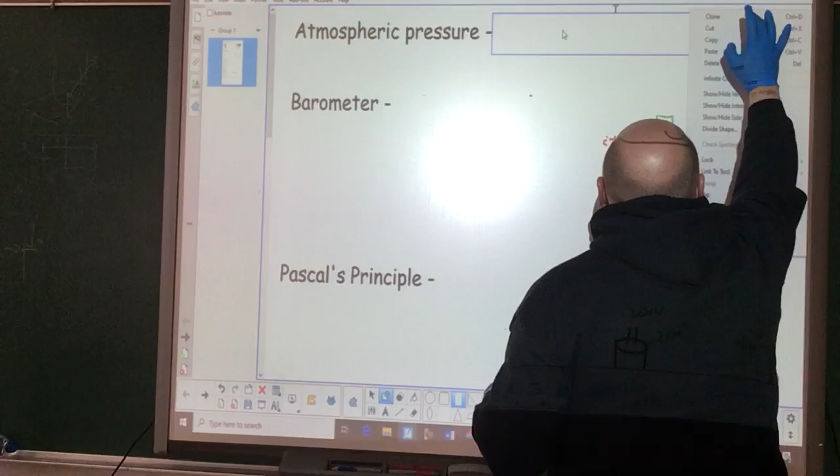We have what is called atmospheric pressure. This atmospheric pressure is pushing in on our body. So when you're talking about atmospheric pressure, it is the pressure exerted on our bodies by the environment. The atmosphere is around us, pushing air on top of us. We have a pressure that's put on top of us. It sort of keeps our shape, how we are formed.

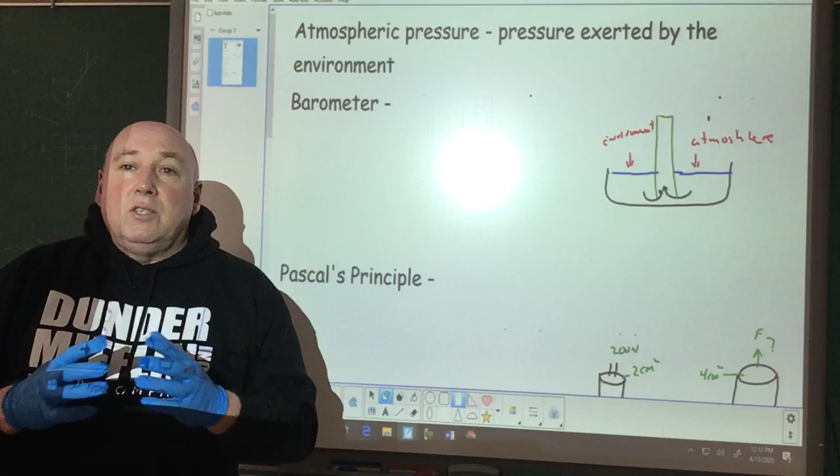Without atmospheric pressure, what would happen is we would probably explode. If you would travel out in space, where you don't have atmospheric pressure, you have to wear a suit. It's called a pressurized suit. If you don't have that pressurized suit, basically you would explode, and that wouldn't be a good thing. So the atmosphere that we have continues to push on top of us to sort of keep us how we are.

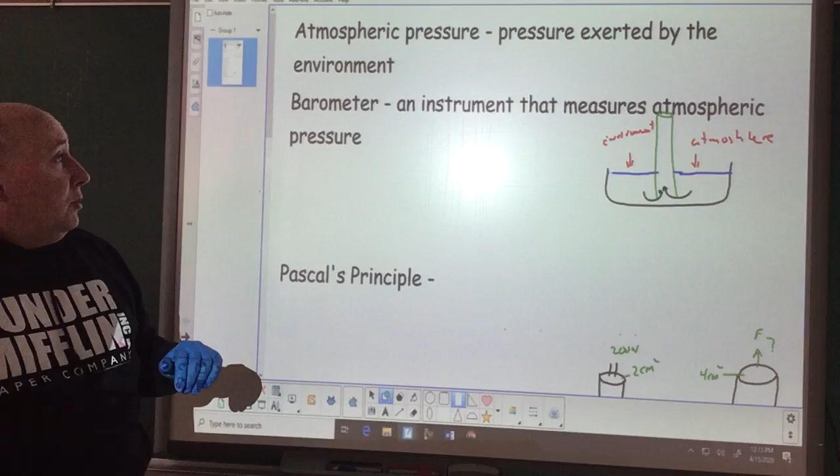The barometer is an instrument that's used to measure atmospheric pressure. An instrument used for the atmospheric pressure, and that is what is called a barometer. Now they basically have all computerized stuff, and digital things that are on the wall that can measure that pressure.

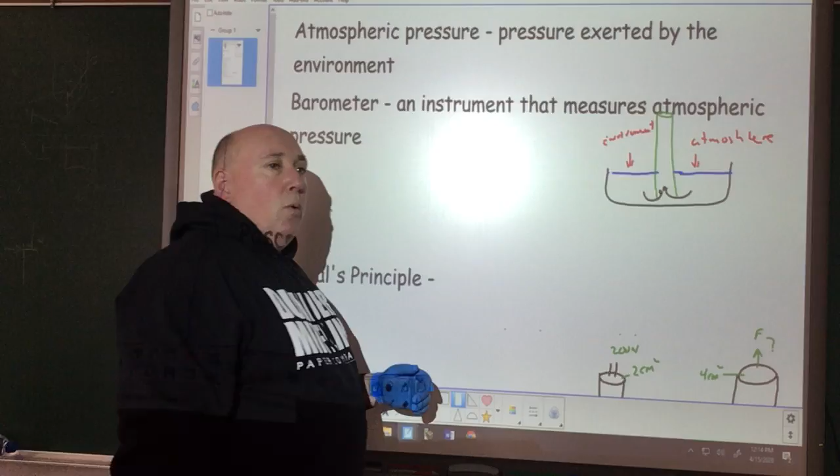But the old school way, how they used to do it, the barometer used to be in a dish that was contained. You'd have this dish here. You would fill this tube up and turn it upside down, and then it would lower to a specific level because there was pressure being pushed up that was pushing the fluid back up in there. There was pressure pushing down here that would keep the fluid up in this tube. That's how they used to measure atmospheric pressure - the height that you had there was the atmospheric pressure, because you had the atmosphere pushing down and pushing the fluid up into the tube.

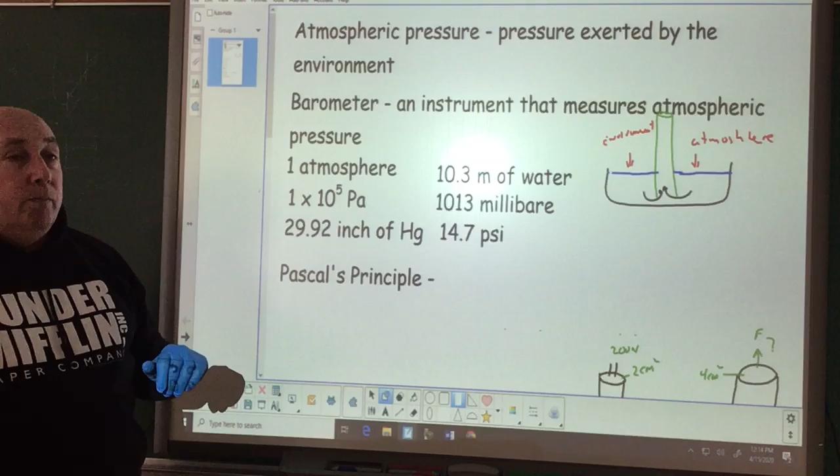Now, standard measurements for pressure. You have 1 atmosphere of pressure. In the SI system, that's 1 times 10 to the 5th Pascals. That is the standard atmospheric pressure. This is what typically the United States still uses, 29.92 inches of mercury. This is a standard pressure. Once again, these are all standard pressures.

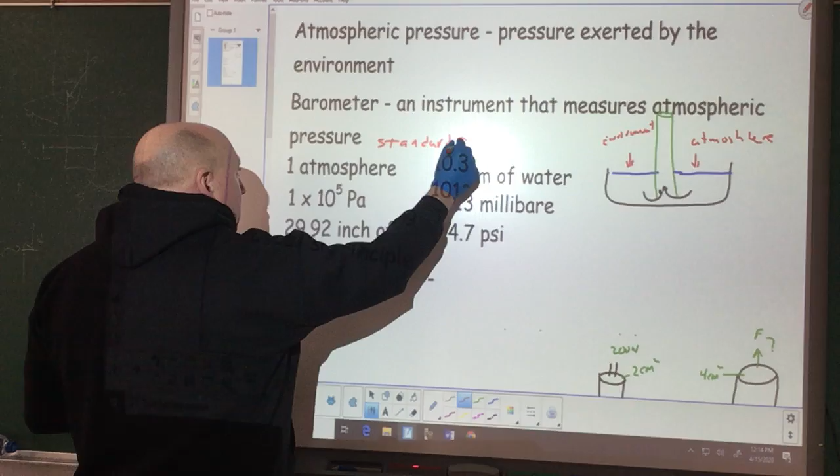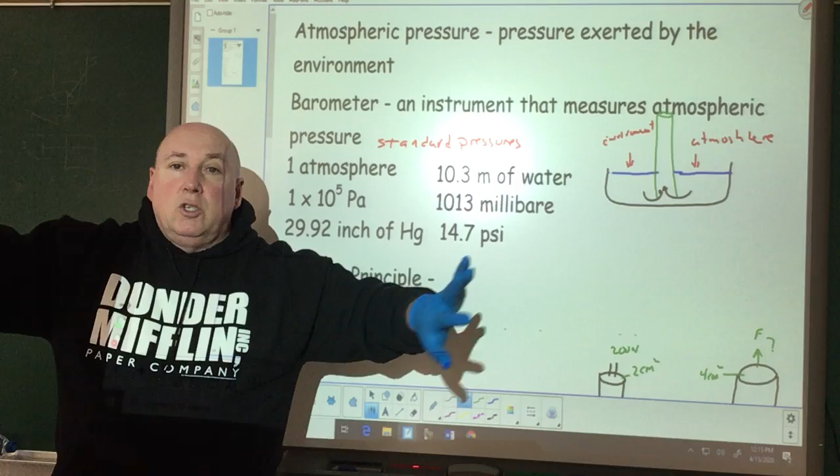These are all standard pressures where everything is just average, basically. The weather systems that we have coming in, we have a high pressure weather system and a low pressure weather system. High pressure tends to bring us fair weather. It puts more pressure on the clouds and just shoos the clouds away. That's a simple way of thinking about it, shoos the clouds away.

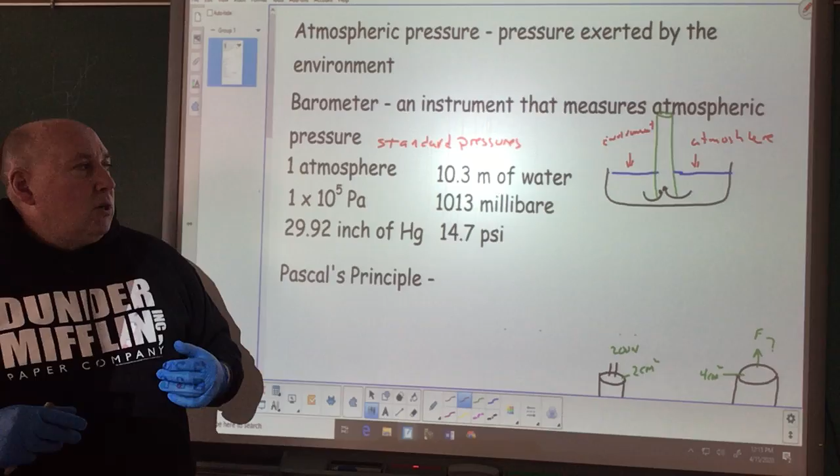We also have pressure volume. You have the ideal gas law, that you increase the pressure, you'll decrease volume of what is around, also with respect to your air. This column of water, if this is a column of water, it would support 10.3 meters of water - it's pretty tall. That's 1,013 millibars or 14.7 psi.

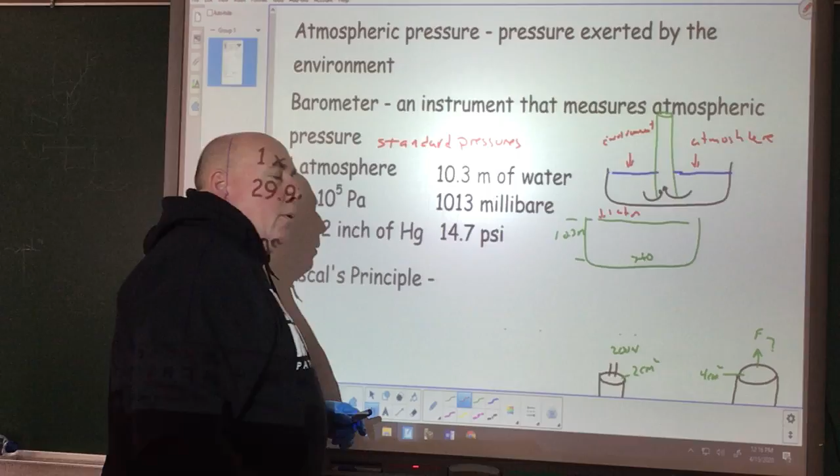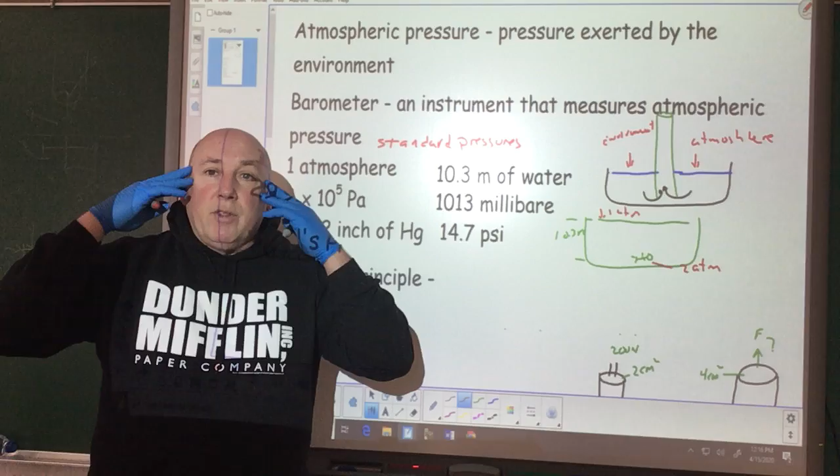This 10.3 meters of water - if you were sitting in a pool, and you're down here on the bottom of the pool, and this is 10.3 meters - what this would result in is you have an atmosphere of pressure that we feel on our bodies right now. If you come down to this level right here, you would feel a second atmosphere of pressure because you're 10.3 meters below the surface of the water. Once again, the pressure that you have would be hard on your eardrums. You'd feel it in your eardrums.

Weather systems: a high pressure system gets up about 30.5 inches of mercury, while low pressure gets down to 28 or 27. When it drops really low, that means bad weather systems are coming in—hurricanes, snowstorms, blizzards come with low pressure. High pressure shoos the clouds and bad weather away. We like being under high pressure systems, unless you want a snow day. High pressure weather systems mean you're going to get sunny weather.

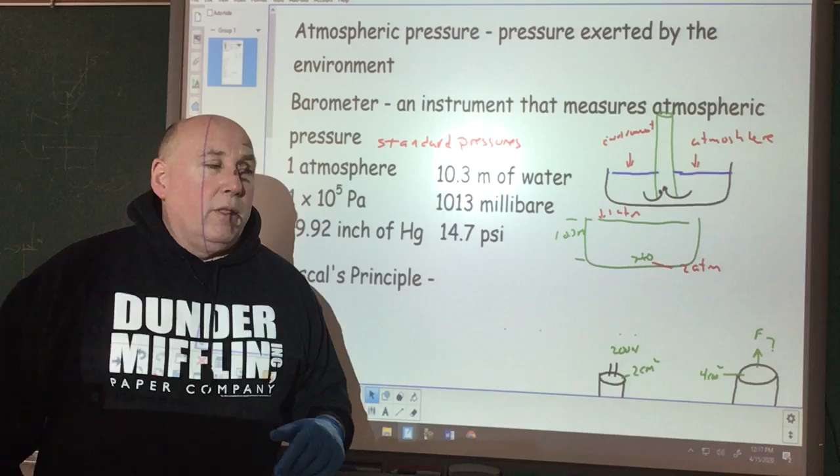Pascal's principle. This is used a lot.

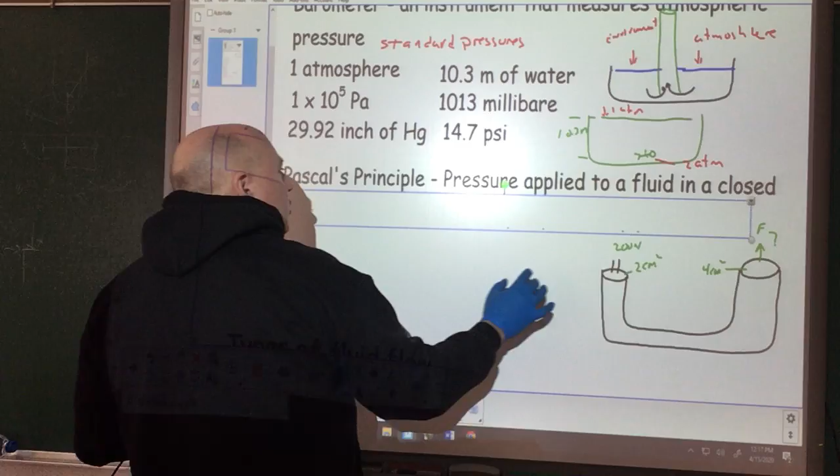Think about hydraulic lifts, lifting up cars at automobile shops. They use Pascal's principle to determine this. Pascal's principle states that pressure applied to a fluid in a closed container is transmitted equally to every point of the fluid and to the walls of the container. You will have equal pressure throughout, not equal force, equal pressure throughout. Blaise Pascal was also a high-end mathematician. He developed mathematical principles—a lot of those scientific guys back then dabbled in both math and science.

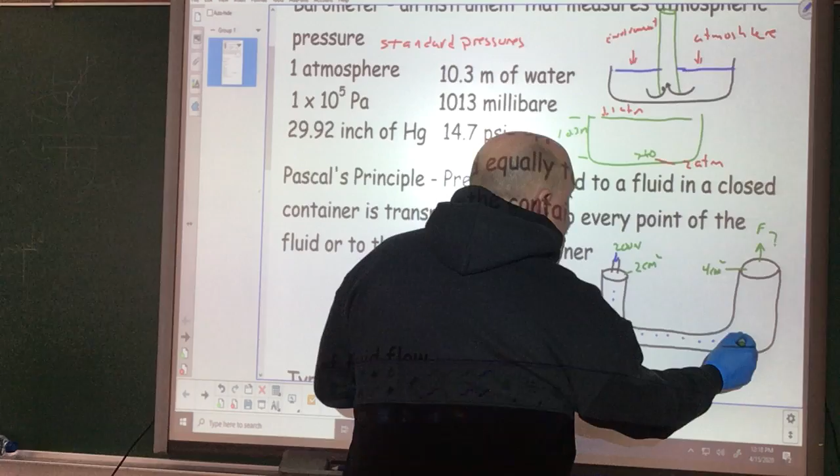Let's take an example: we have a 200 Newton force pushed down on a plunger for this hydraulic lift. This is a very crude hydraulic lift, that's fine. The pressure will be the same throughout. The force will not be the same throughout unless the areas remain consistent. But if the area changes, the force being pushed upward will change also.

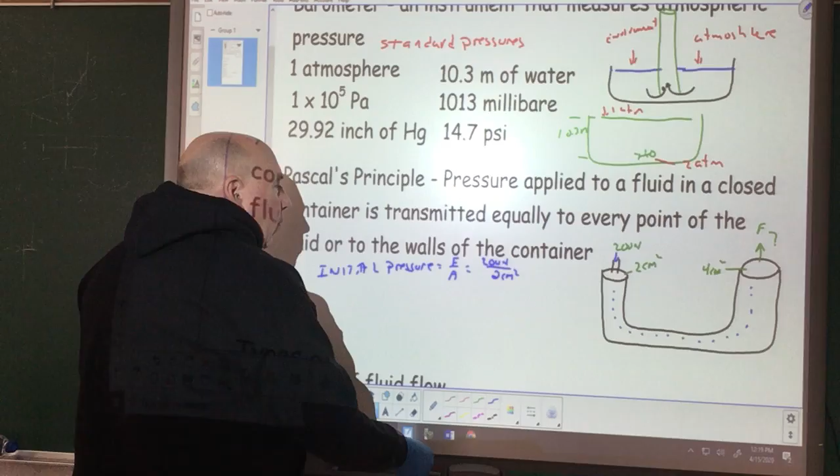So we have a 200 Newton force and 2 square centimeters as our area. Our initial pressure is equal to force divided by area: 200 newtons divided by 2 centimeters squared. So our initial pressure is 100 newtons per centimeter squared.

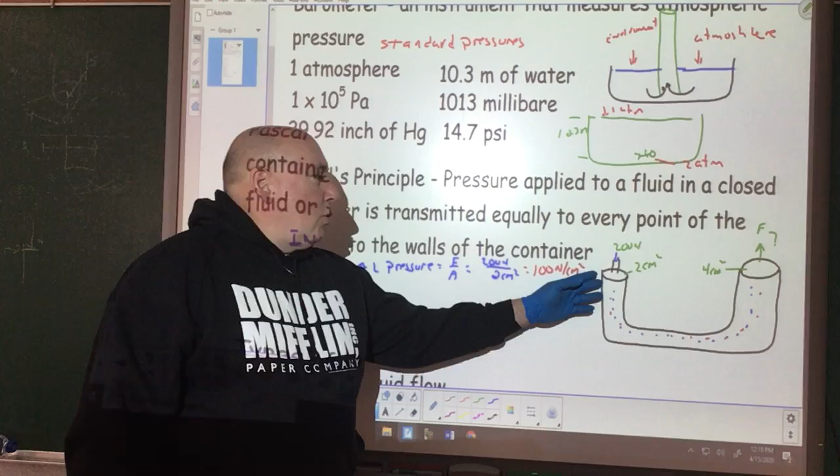That pressure will be the same throughout this entire container—100 newtons per centimeter squared. I didn't convert to meters since I have square centimeters that cancel out. But if I had newtons per meter squared, those are called Pascals—Pascal's principle, yes, there is a relationship there. So we have 100 newtons per centimeter squared throughout this entire device.

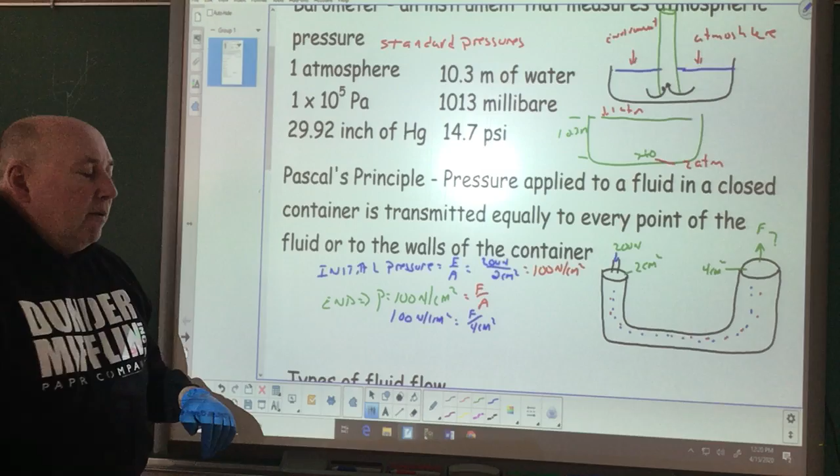What would be the force coming out? I have 4 square centimeters as my area as I leave. At the end, the pressure still has to equal 100 newtons per centimeter squared. Pressure is force divided by area, and my area at the end is 4 square centimeters. So 100 newtons per centimeter squared equals force divided by 4 square centimeters. We multiply both sides by 4, and my force at the end equals 400 newtons. So I start with 200 newtons here and end up with 400 newtons coming out the other end.

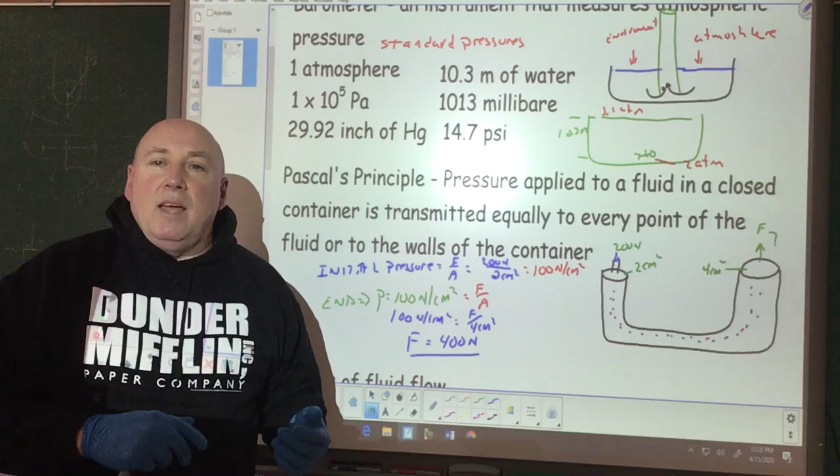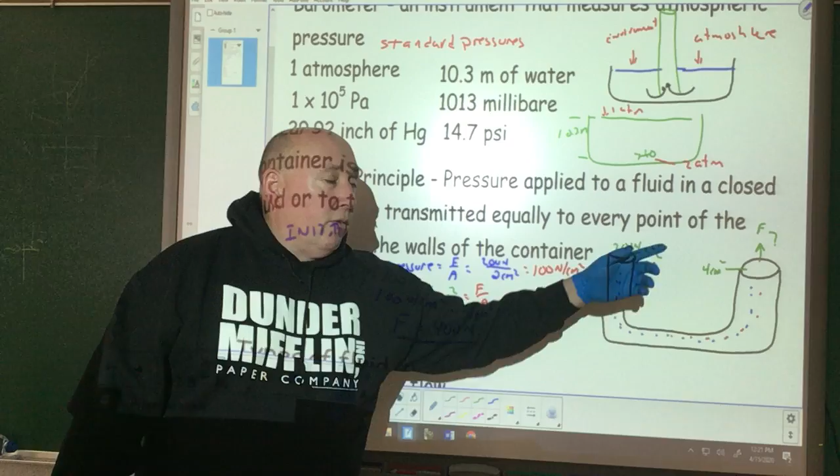So I'm exerting a force—this is a machine, like we talked about before, that makes life easier. As I apply pressure here, I increase my force over there. I don't have to exert as much force here because I'm restricted by area, but over there I get more force coming out. That's a good thing—that's how hydraulics work.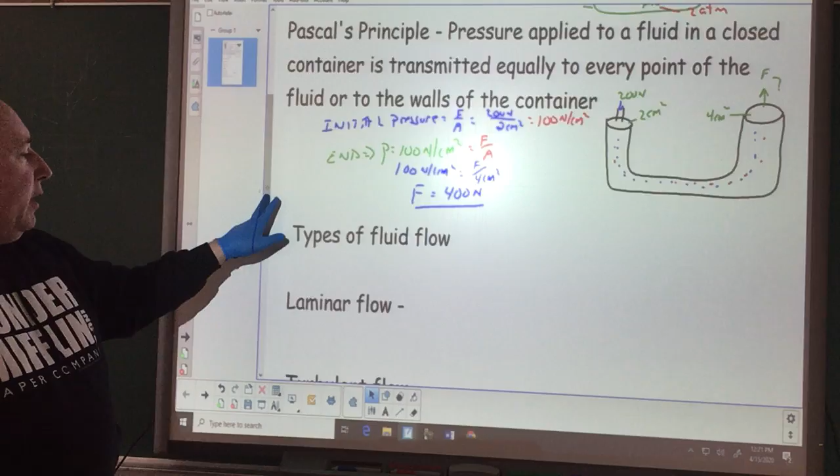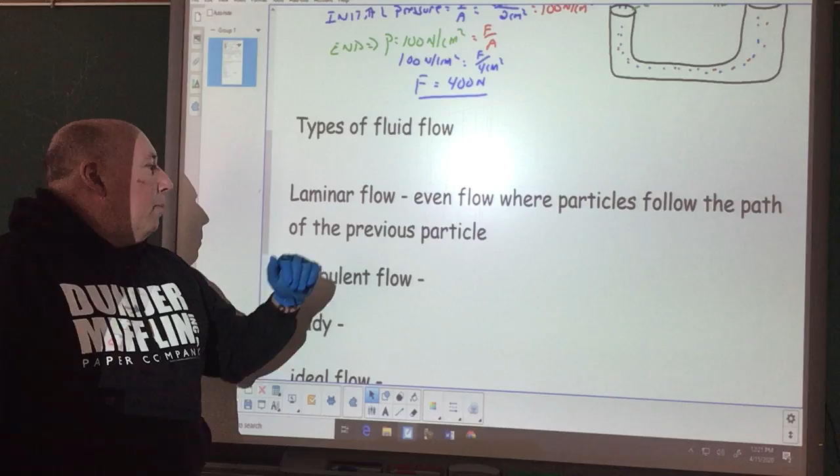Types of fluid flow: we have laminar fluid flow. When it's laminar, you have an even flow where particles follow the path of the previous particle—like a nice even flow of water or air with no bumps in the road. It's like driving on a nice paved new highway where it's smooth, not like going down Burton City Road trying to get through all the potholes. A nice paved road—that's like laminar flow.

But then we have turbulent flow, which is an irregular flow with interruptions—you tend to have jagged patterns. Turbulent flow is like turbulent driving down Burton City Road. That road needs to be redone.

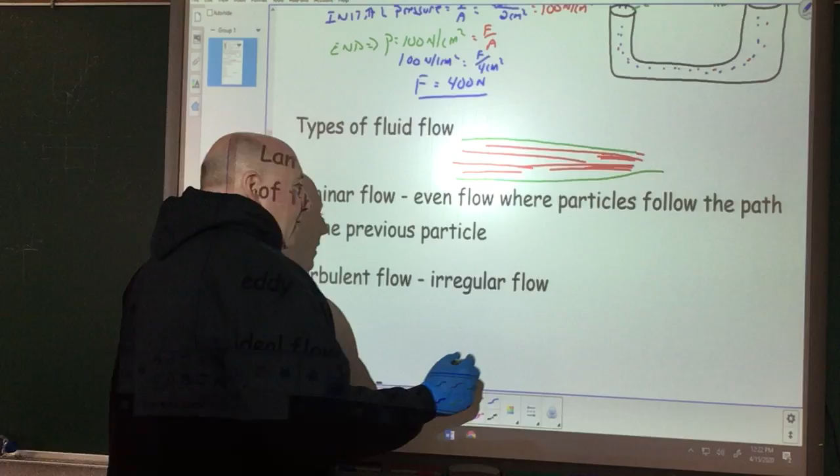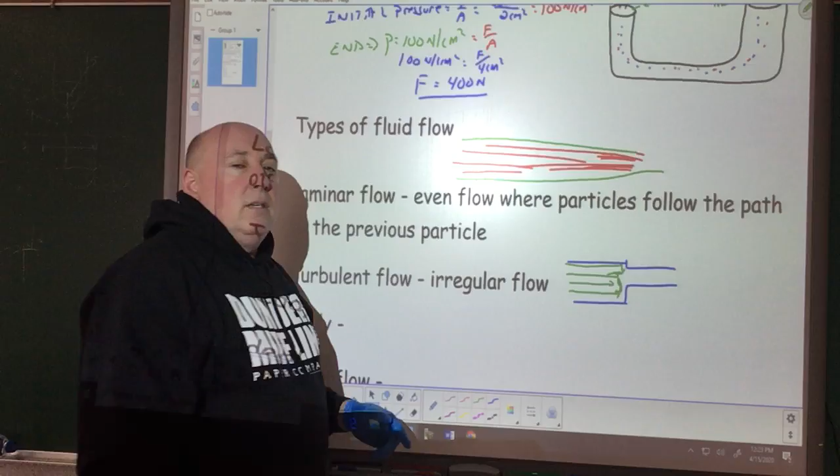If we had a pipe that was restricted, the water or air flowing through it would start hitting the walls, and all of a sudden we'd have to start taking right turns and left turns and getting in each other's way. What would happen is you start getting a turbulent flow at that point.

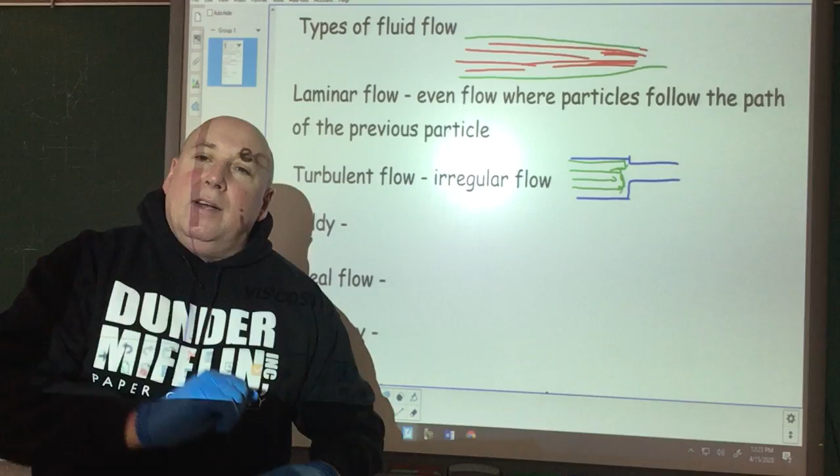When you have irregular flows, that's a turbulent flow. Think about going canoeing down the river—when it's nice and smooth, that's your laminar flow. But every once in a while you get to the raging rapids with all those rocks underneath the river, and all of a sudden the water starts getting churned up and pushed into the air. That's a turbulent flow.

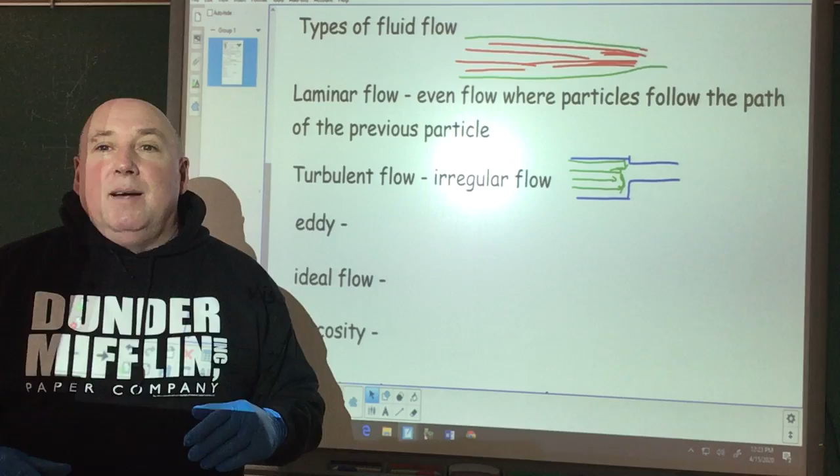The raging rapids, we sort of enjoy those at times. You've got to hang on a little bit, but those are fun to go through. That's a turbulent flow compared to a laminar flow.

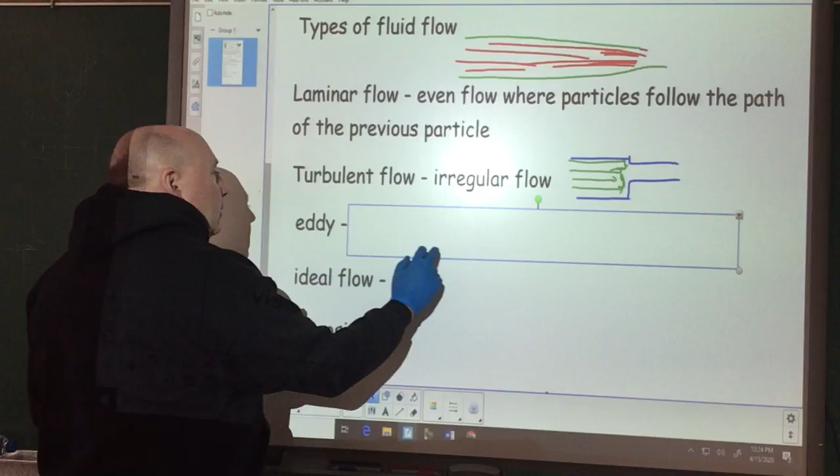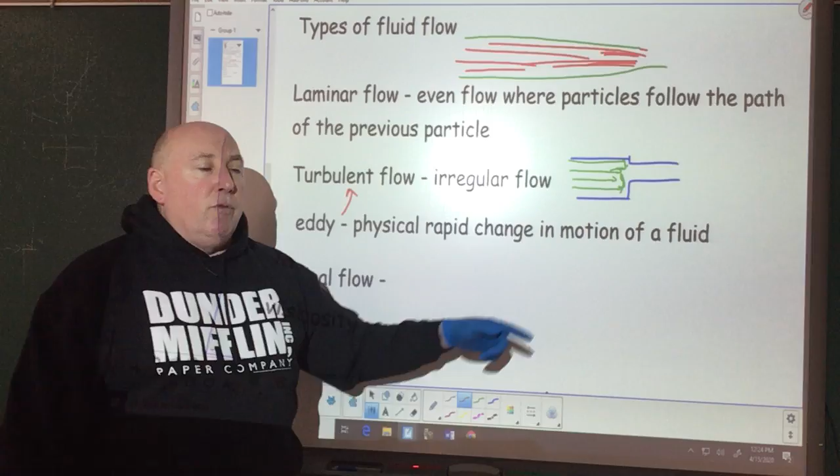Let's talk about an eddy. They are physical, rapid change in motion of the fluid. When you have turbulent flow, you're going to have things called eddies. What happens is the flow will start going, hit a wall, and then it will start swirling, and this will start swirling, and then you get these little eddies. Those are caused by turbulent flow.

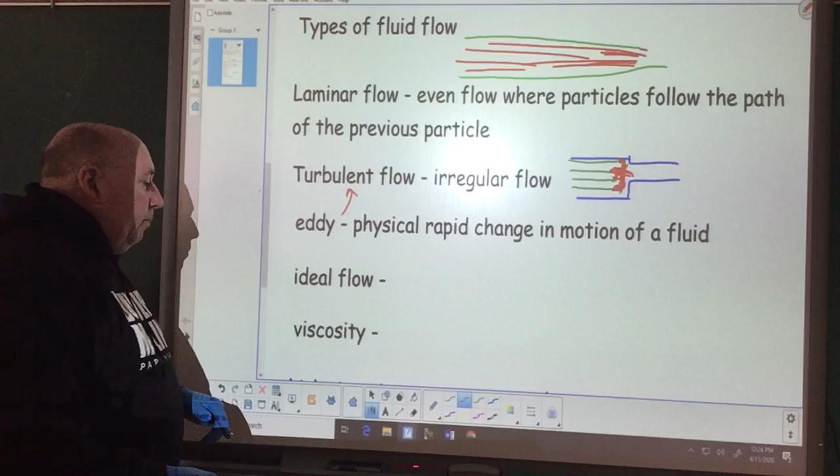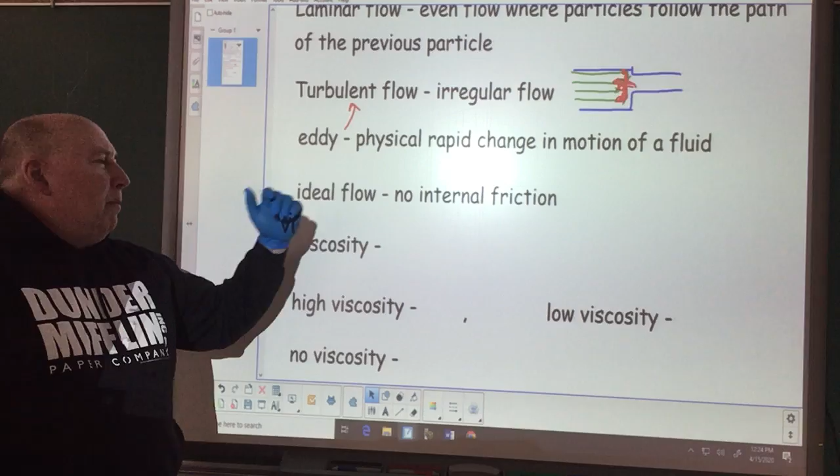Ideal flow has no internal friction at all. But ideal flow is probably not going to happen because there's always going to be friction. In a perfect world we'd get an ideal flow, like the ideal gas law—you get an ideal gas. But to get an ideal gas is never going to happen because there's always going to be friction, and if there's friction, it's not going to be ideal. But it gives us good guesstimates and predictions.

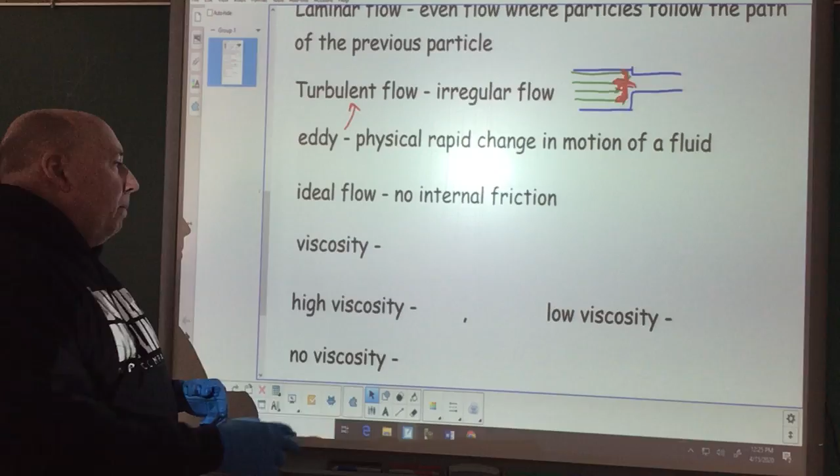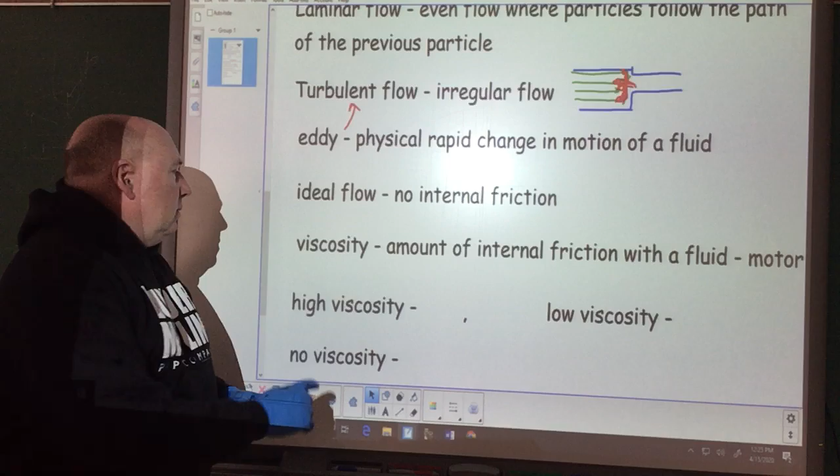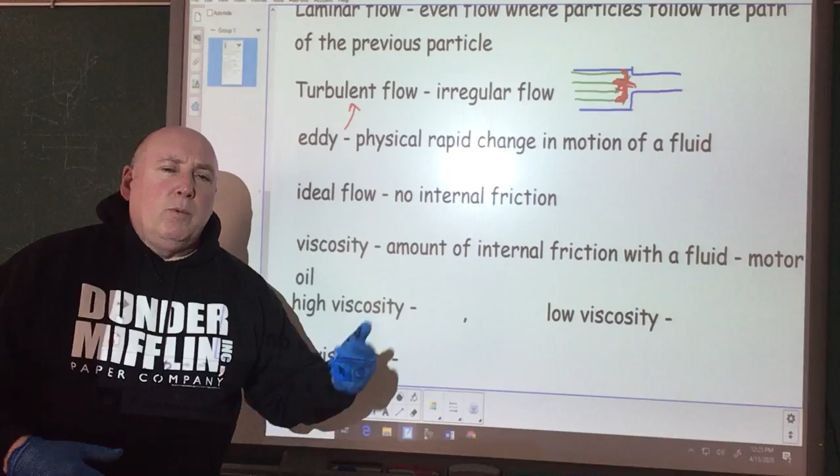Viscosity is the amount of internal friction within a fluid. An example of viscosity is motor oil. Motor oil tries to reduce a lot of the friction within your engine, so you have to make sure the viscosity is good enough to eliminate a lot of the heat and other things going on within your engine. So viscosity is the internal friction within the flow of a fluid.

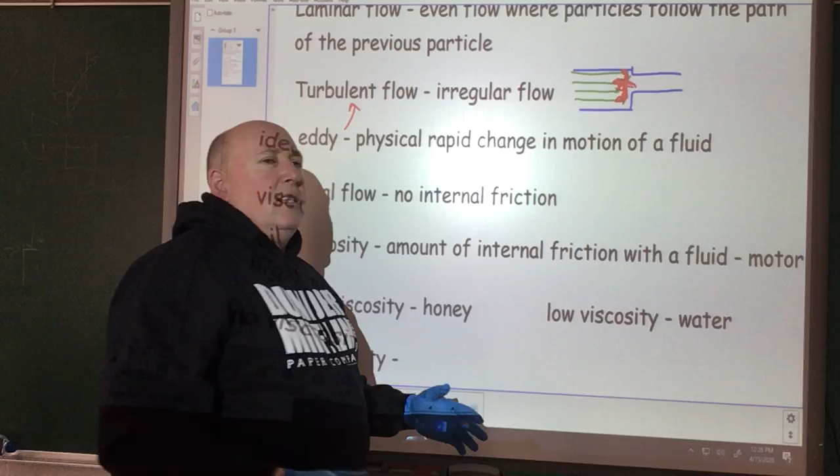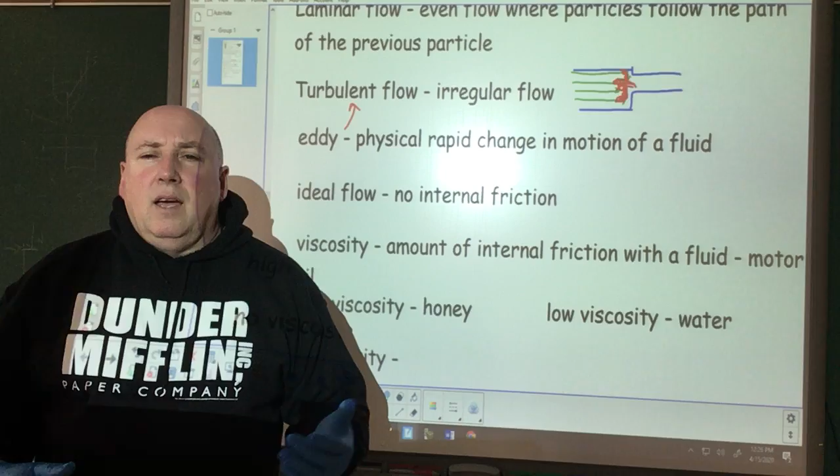High viscosity—honey is high viscosity. Low viscosity—water. Things that flow nicely will have less viscosity. Honey doesn't flow nicely, so the amount of friction there gives you a high viscosity.

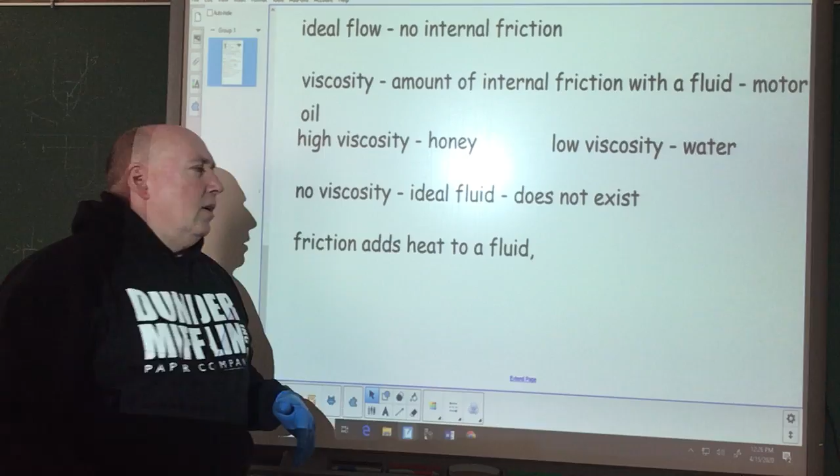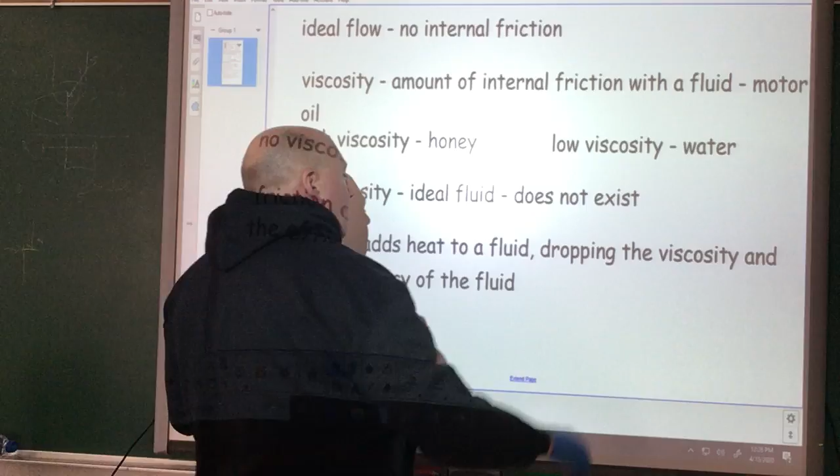No viscosity describes an ideal fluid, but once again this does not exist. It's just a way of trying to get to a point where you're simplifying things. Basically, when you talk about viscosity, you're talking about friction, and to eliminate friction, you eliminate viscosity. The thicker things are, the higher the viscosity is. The less thick they are, the less viscosity you have.

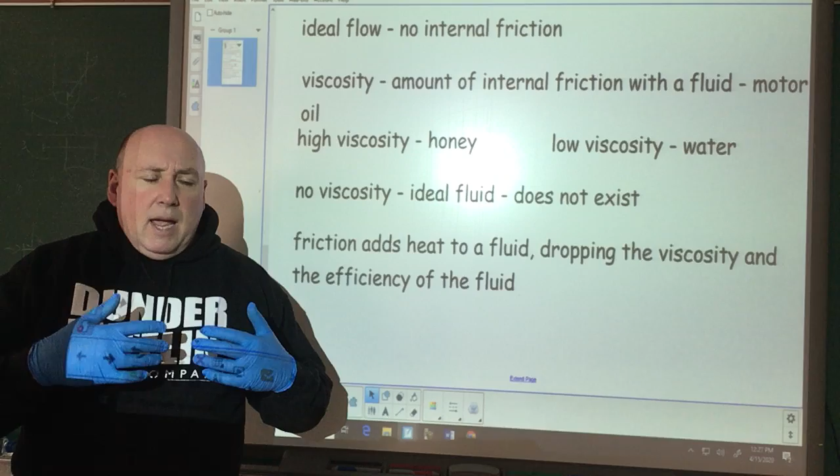Friction adds heat to the fluid, dropping viscosity and efficiency of the fluid. You want a highly efficient fluid. For motor oil, you want it to absorb contaminants within your engine, absorb the heat from your engine to reduce friction, and that's what motor oil does—it cools your engine down and helps it work more efficiently. That's what we want to do: reduce the friction, and that's what motor oil absorbs.

It absorbs the bad stuff that happens within your engine.

Tomorrow we'll come in and talk about some more types of fluids and fluid flow, what occurs with respect to fluids and Bernoulli's principle, and we'll talk about how airplanes fly. We'll work with the speed and pressure of fluids—that's how airplanes fly. But for today, this will be good enough.